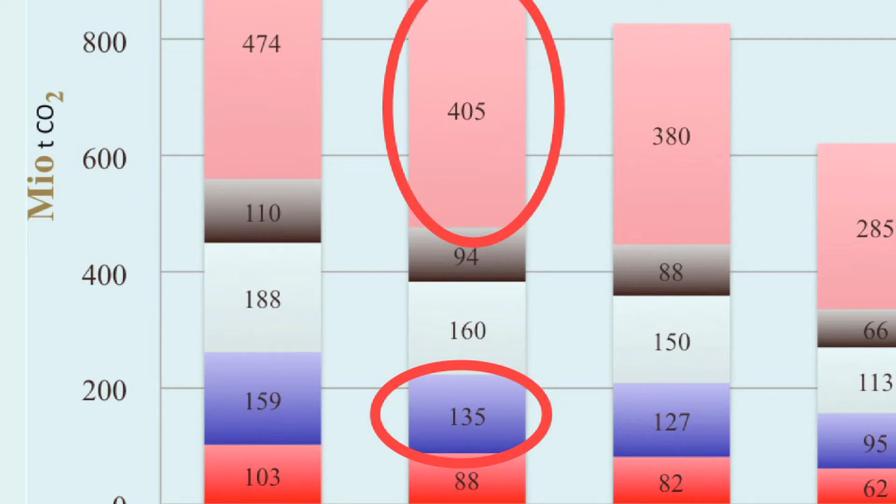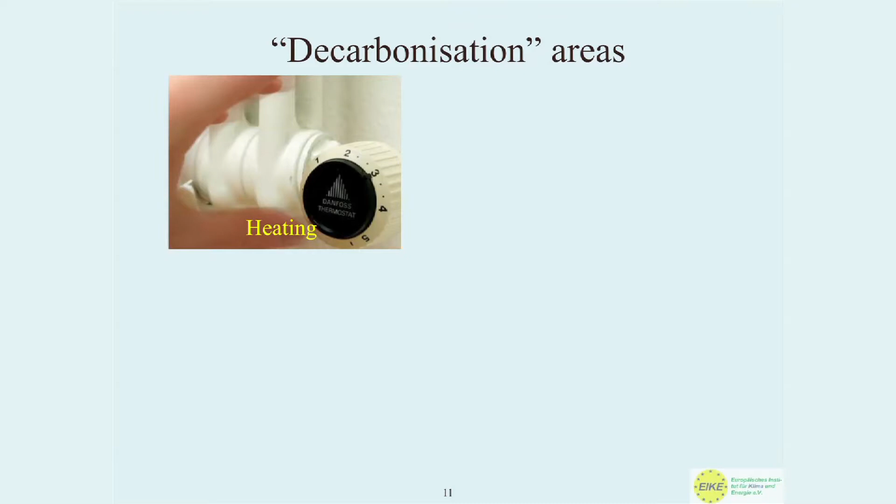I have no time to tell you what happens to all the sectors of CO2 creation, but I selected two of them. Number one is the power supply sector, the biggest, with a little less than 400 million tons annually. The second is the heating of private and public buildings, about 135 at this time. These should come down to 95 and 35, about that. These decarbonization areas are regulated by a number of laws and will affect households, heating, power supply production, fossil fuel traffic, and industrial production. I concentrate on heating and fossil fuel.

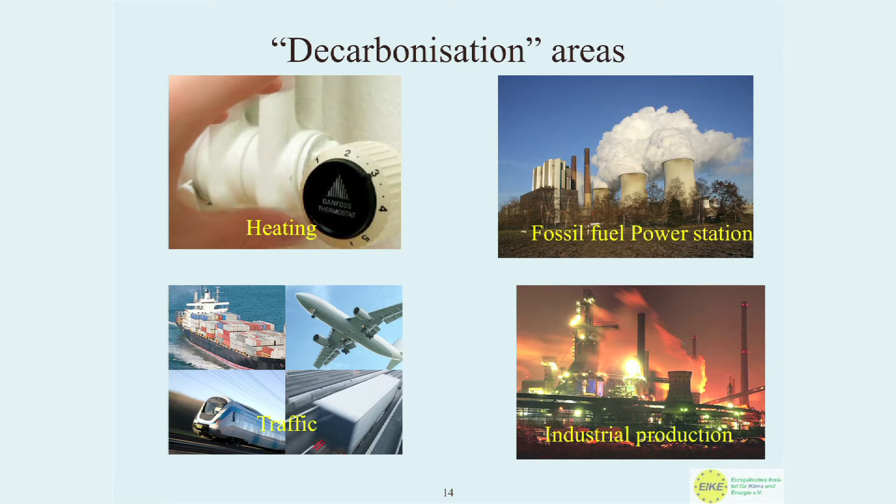Therefore, I selected the government acts, named Erneuerbare Energiengesetz, EEG, whose predecessor, the Stromeinspeisegesetz, current feed-in law, was invented by Ms. Merkel in 1992, when she was Minister of Environmental Affairs, and then blown up into the Erneuerbare Energiengesetz, Renewable Energy Act, in 2001 by the Red-Green government under the Green Minister for Environmental Affairs, Jürgen Trittin.

It's followed by another act, called EnEV, Energieeinsparverordnung, or Energy Savings Act, directed to private and public buildings. And recently they added the EEWärmeG, Erneuerbare-Energien-Wärmegesetz, Renewable Energy Heating Act. This forces private and public owners of buildings, in case they want to replace an old heating system, to build in by law renewable energy supplies rather than fossil heated ovens or furnaces.

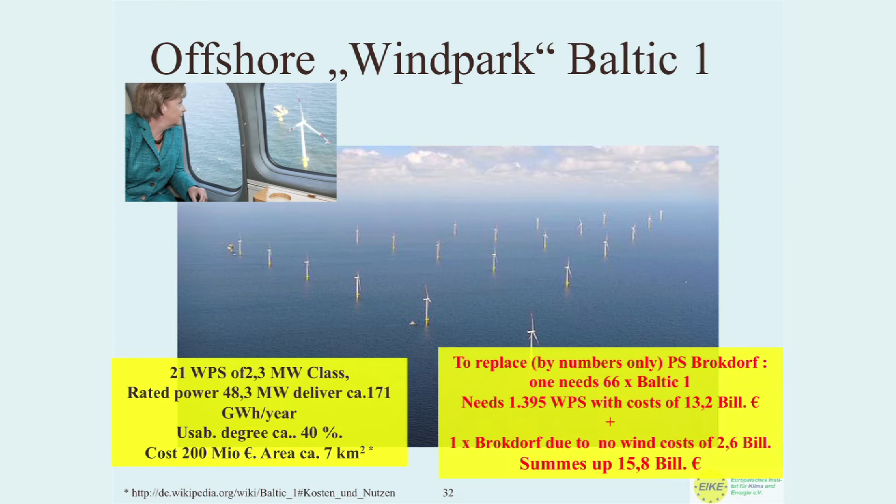To replace by numbers only the power supply of a power station like Brokdorf, which is in Hamburg, 1,400 megawatts of rated power, you need 66 of these Baltic 1 plants, with about 1,400 wind power stations, costing 13.2 billion euros. And in addition, you need one power plant like the existing Brokdorf, because even on the Baltic Sea, wind is not blowing all the time, and we depend on highs and lows from the weather to create the electricity we need. So we have to add this, which is double or triple as much as the other one. We end up at 15.8 billion.

This Brokdorf power station supplies the city of Hamburg, and to replace it, we have to cover half the city of Hamburg in order to establish it. So in total, it's not 13 and not 17 times more expensive, just 6 times more expensive than conventional. But it delivers nothing different. It delivers just the same, but it's 6 times more expensive than conventional.

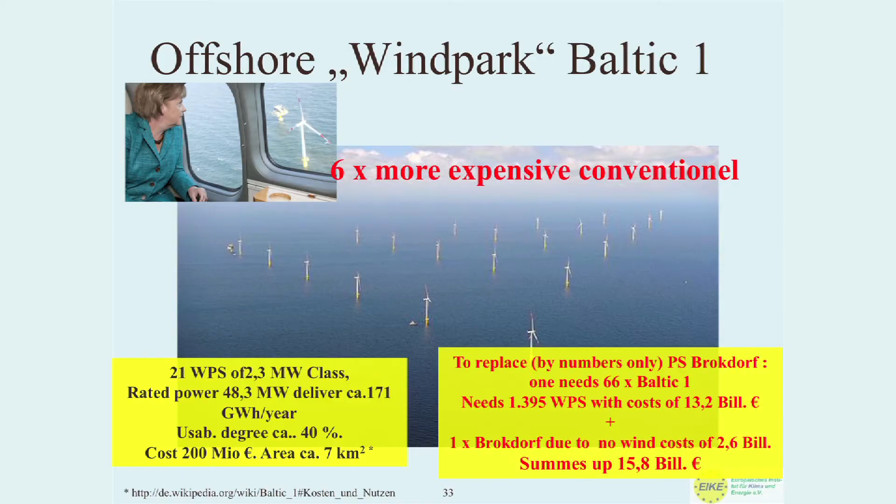That is the reason why every approach to reduce the cost of renewable energy is limited by the low energy density, and I have not spoken so far about the volatility, which is the other natural law that prevents us from delivering current whenever we need it, because we cannot store the electricity.

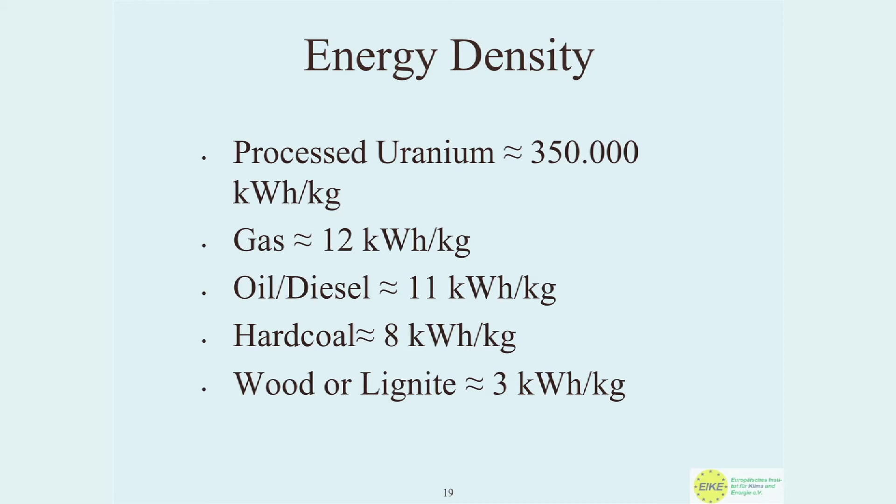The area which is covered by such technology I took out of a British newspaper. They decided to buy 10 nuclear power plants in the United Kingdom. The first one is rather expensive. It will be erected at Hinkley Point. I don't know where it is, in the north of England, I guess. And it covers 1.74 square kilometers.

By the way, this will be built 90% by Chinese companies, and Areva, the French company, has the honor of delivering 10%, the shovels and the workers to prepare the ground and perhaps to spend some money for it. Even now, the British government has not enough money to pay for it by themselves. So 1.74 square kilometers.

Having the same rated energy produced by solar farms, you need 526 square kilometers, that is 300 times the area. And if you use onshore wind farms, you need 1,000 square kilometers, that is 580 times.

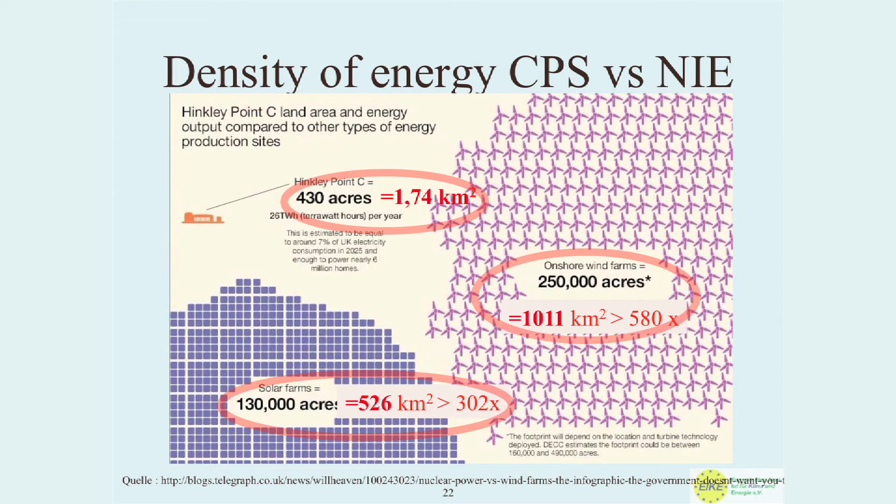Now people say, oh, forget all this, we have biomass. Biomass is even worse in energy density and requires about 3 times the area of the wind farms, where you can, of course, seed corn and harvest it and then make energy out of it. So if we want to fulfill our plans in Germany with biomass too, which is storable, so you can produce the energy as soon as you want, you need about 3 times the area in Germany where agriculture is possible.

The other problem of renewable energy is the volatility and the non-predictability of when it is available. So you need storage. The biggest German storage is a pumped storage unit established in the former GDR in the area of Thüringen. It is this wonderful area where you use the surplus electricity and pump the water in a lake up the hill, and when you need it you open the valves, let the turbines run and produce the current.

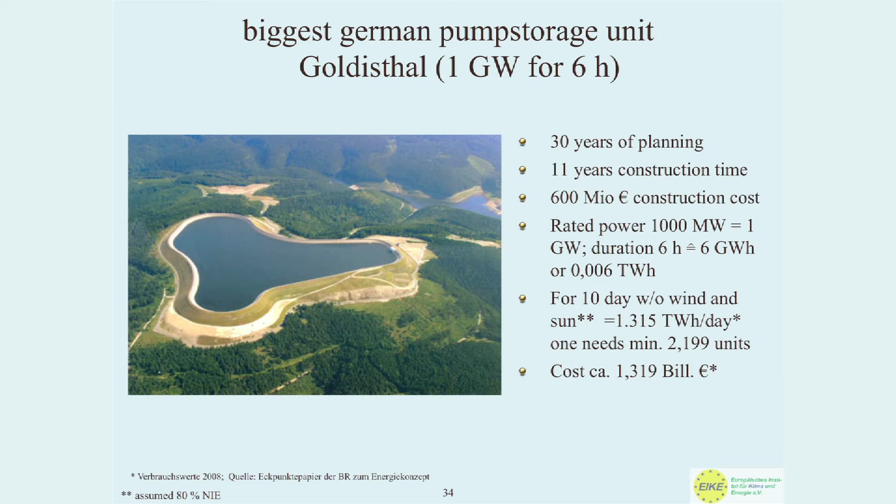Now people say, oh, we are not depending on Germany's topology, we go to Norway, but the Norwegian people are not crazy. They say, number one, our water power supplies are frozen during winter quite often. Number two, that's fresh water and not salt water, we cannot make it. And number three, we would not dream of delivering the energy to Germany through our wonderful fjords and valleys and mountains.

Therefore, the engineers had a good idea: we have enough wind power and photovoltaic power which we cannot feed into the grid, so let us make gas out of it by known physical processes. So the newest hype is wind to gas or power to gas. And here is a chain of the production steps. You need to have created electricity by whatever means. Then you apply it to an electrolytic process. You separate water into hydrogen and oxygen.

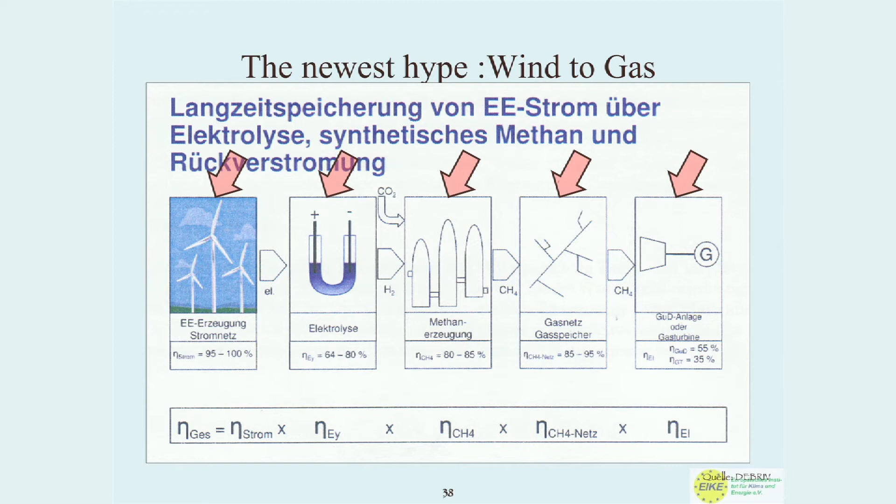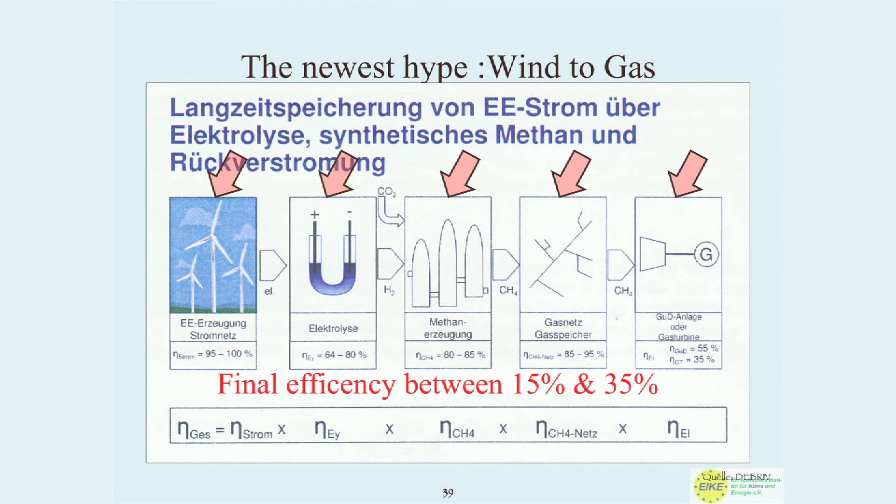What does it mean to the cost? Here is a comparison. Here we have the pump storage facilities as known since some 100 years ago. And at former times, before the Energiewende start, the price per kilowatt hour was about 6 cents per kilowatt hour. Now it rises because we don't have the current cheap enough to feed it.

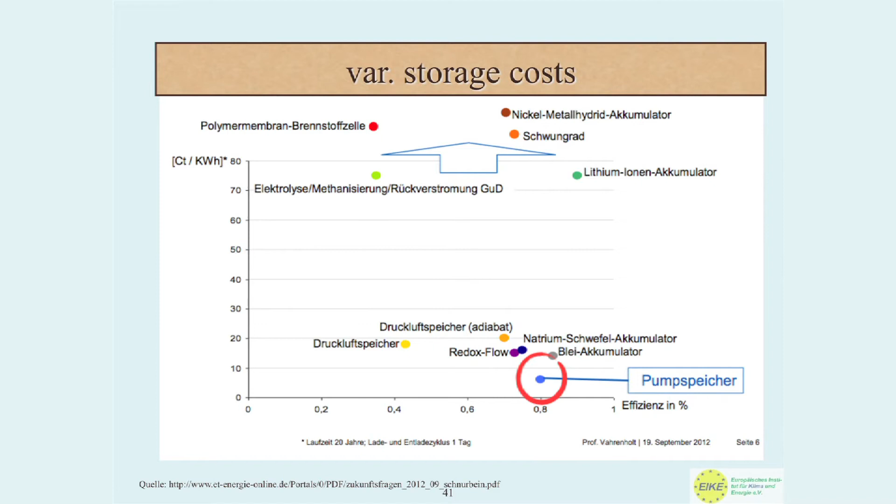And the power to gas price is here about 75 cents per kilowatt hour, but it comes near to 230 because of the differences in efficiency during the whole process of creating hydrogen and then making electricity out of it. So anywhere between 75, 100, 150, 230 cents per kilowatt hour will be the result.

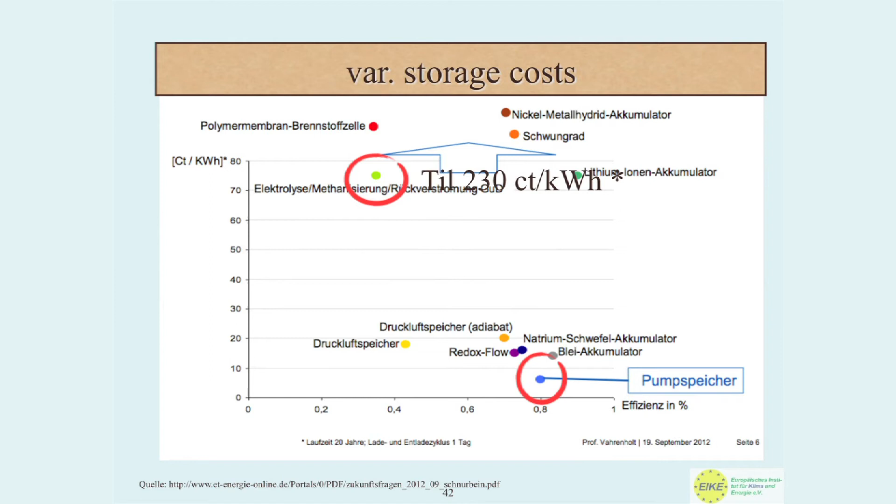But this law, which is the most important export good from the government, 46 nations have adapted to it. It forces us as the consumers to pay this amount for the owner 20 years long. The idea was to ensure investment security, and every company owner says, oh, wonderful, here I have an investment security. Where else in the market do I have investment security for such a long time? Nowhere, but here we have it, 20 years guaranteed.

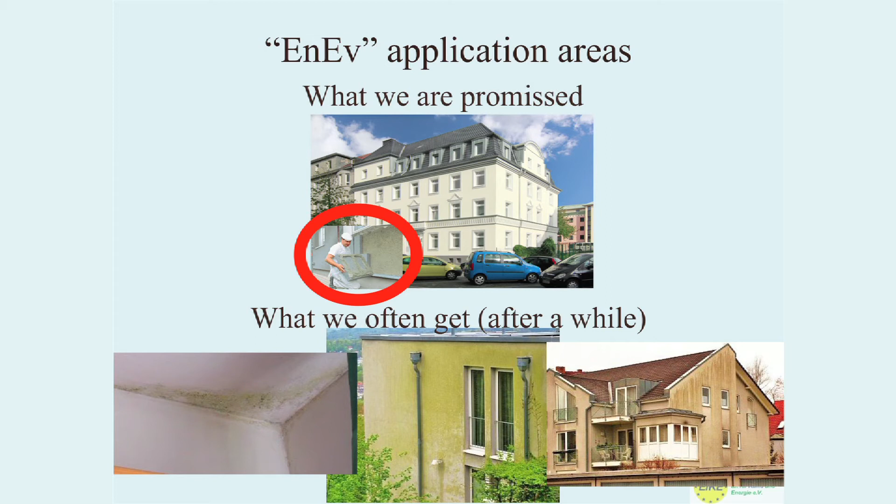I make it faster. That is especially for the heating system. The media shows that after investing the money needed for that, forced by this law, we will have such wonderful buildings, very nice, looks beautiful. What we often get after a while is this: about 50% of all lawsuits in Germany are about struggles between tenant and owners, is this black and green mold. After a while the buildings are looking like that. That's what we get, not in all cases, but in quite a lot of cases.

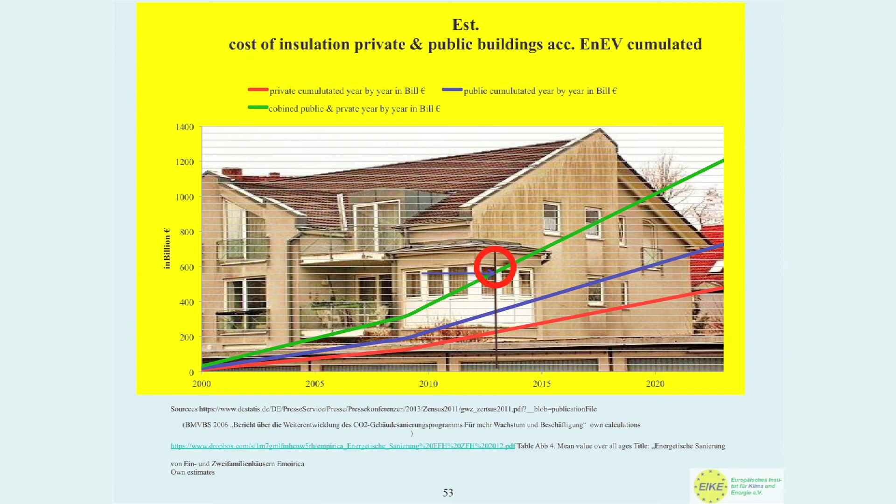And here I have the same type of curves, showing the development of this. The blue is the public and the green is the total. We see here we have paid already 300 billion euros for this, and now it's speeded up because government forces us to be faster, 2% annually. This comes up to this value. Here we have today already accumulated 570 billion euros spent, and this goes up in 2023 to 1.2 trillion.

A number of independent studies shows that the return on investment for this investment is not nil, not +1, not +2 or +3%. It's in average -3%. So you will not only lose money in spending it for this insulation and other means, but you have to pay annually even more to keep it alive, to keep it working. Here again, 3 trillion in total, and you have increased maintenance cost.

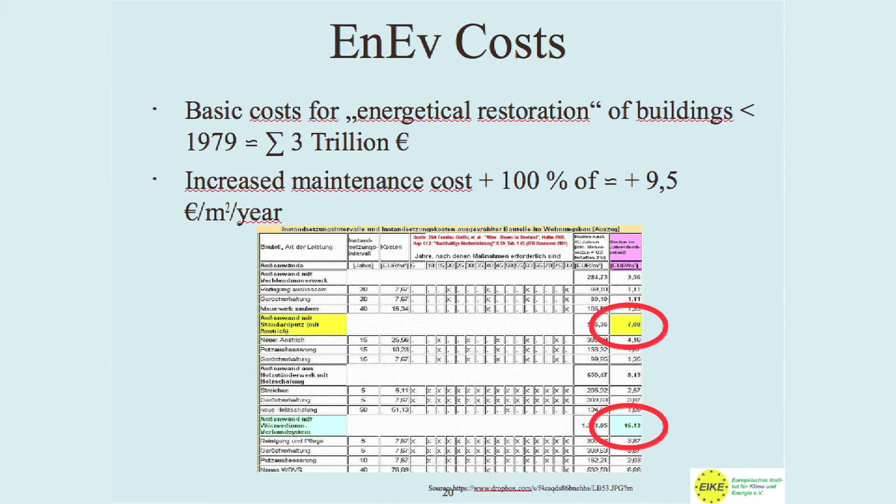If you have a normal house, you have to spend 7 to 8 euros annually per square meter for the facade, and by applying the ENEV law, you have 16.2 euros. So the proprietor, the owner, is forced to spend all this money, and the law says you can transfer this money to the tenant, and he either can get out or has to pay it. In 10 years you can apply about 10% of the invested money.

What I haven't tackled so far is what happens to the industry. The industry is the backbone of our wealth, and the industrial production is heavily affected. I don't know whether you are aware, but Germany is one of the only states in Europe which still has a very long and working production chain, from basic material production to highly complicated windmills, cars, or what have you.

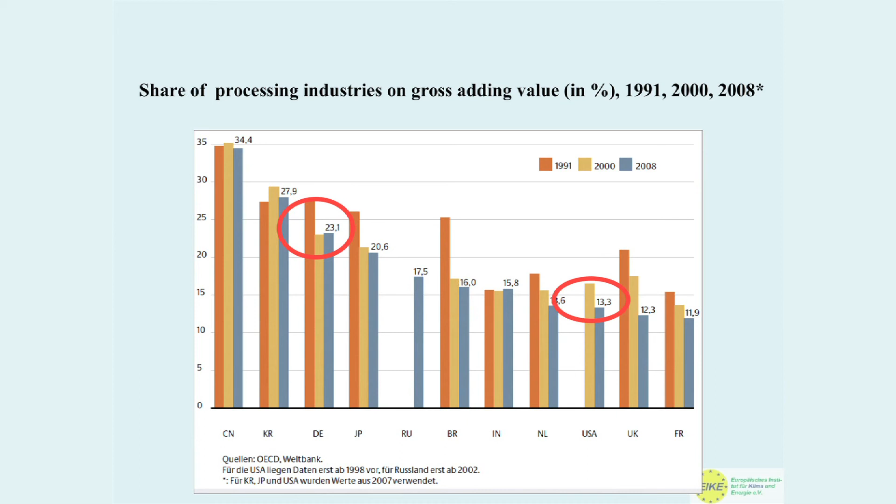When you add the outsourced services like IT or others, you come up to about 30%. In comparison, the United States is about 13%. So these states depend very heavily on service industries rather than on production industries. This will change in the US right now, because of the cheap energy you can supply to the industry. One kilowatt hour in the United States is about 1/3 of what we pay.

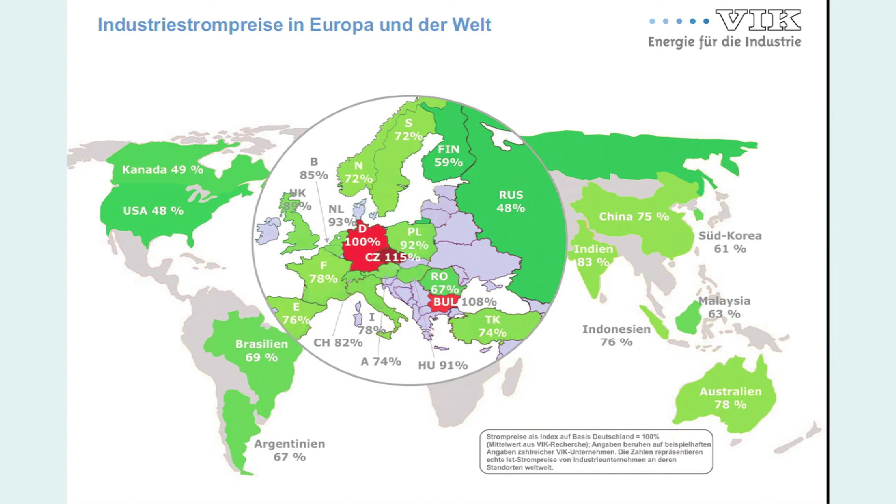Germany has the highest prices for electricity, Czechia a little bit more, and therefore the move of the industry has already begun. You can read it yourself. That is the saying of the president of the BDI, which is the biggest industrial group, which talks with politics to make happen in law and otherwise the things the industry wants. Grillo is the president of it, and he said energy-intensive industry has reached the limits of its resilience.

They will go out of this country, and it starts before, because these companies already don't invest anymore, not in new buildings, new production plants and new process lines, and also say we do not invest in repair and maintenance. So let it fade out: aluminium, cement, copper, and what have you. In this industry we have about 1 million jobs, and they are all due to be lost. And it's unlikely that in Germany a new steel plant, a large chemical plant or a plant for carbon fibers will be erected again.

And now I have some German newspaper headlines from the last few months: the silent farewell of industry. Germany suffers deindustrialization. The intended exit from Europe begins. We are at the limit. Germany is threatened by deindustrialization. BASF warns of exodus of industry. BASF is the biggest chemical plant in the world. And the others say, okay, the Energiewende shouldn't cost any jobs, but of course it will.